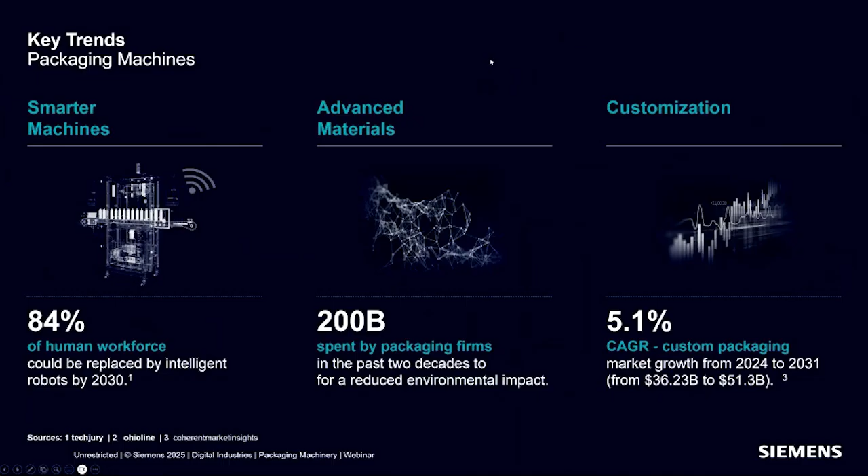The third trend is about customization. As you know, packaging machines incur a lot of cost. So when a machine can be used to package multiple materials for multiple products, it's a big game changer for the users of the machine. One survey predicts nearly 5.1% CAGR growth from 2024 to 2031, and most of this growth comes from the customization aspect of packaging. The slide also shows the figure; it is supposed to go to roughly 50 billions.

On the next slide, what we are trying to show here are some of the common challenges the users of packaging machinery face. This comes from a survey of CPG companies. The first one is general wear and tear. Of course, the older the machine, the wear and tear has a direct impact on the productivity of the machine. So that is a key challenge the users of packaging machinery face.

The next one is operator error. As you know, when we move from one packaging material to another, or a smaller package to a larger package, a lot of things need to come together to make it work. And if the operator makes any mistakes, that can also jeopardize productivity. The next key challenge I would like to highlight is product switching. In some instances, it's necessary to change certain components or elements in the packaging machinery, and that can also cause issues at the startup phase.

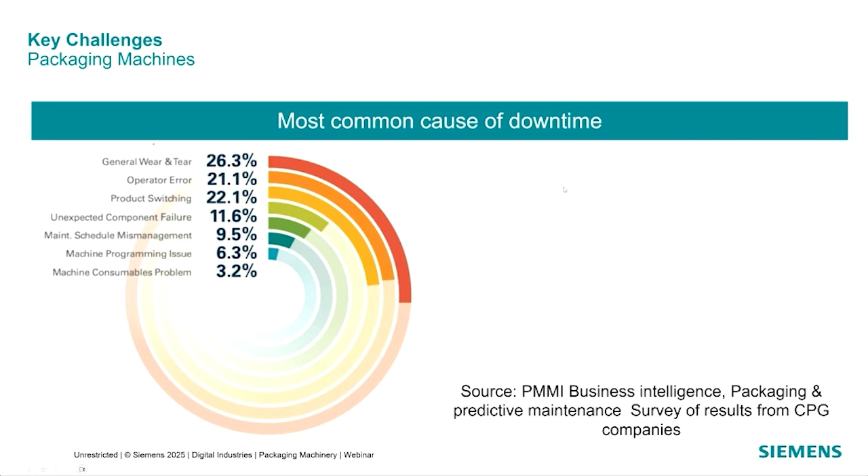And last but not least is component failure. Packaging machines have a lot of actuators, electric motors, welders, converting mechanisms, etc. Failure of these components, roughly 11%, is also a big concern for users of packaging machinery. So given these challenges and the key trends, the next big question for all packaging machinery companies is how they can respond to these changing market trends and launch products to market quicker, in a very responsive way.

Next, how can you gather information about the usage of the machine? Do customers appreciate the new features that have been delivered to the machine? Have the features been heavily used? Given the customization and the smart capabilities built into the machine, are manufacturers able to collect this information?

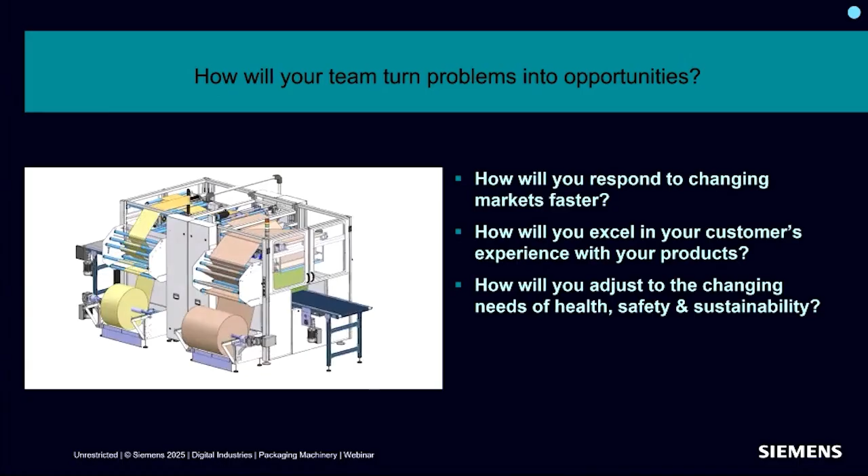And last but not least, how to adjust the packaging industry holistically for sustainability, while keeping the food and beauty products they protect safe and healthy until they are used and disposed of. So collectively, how can we change these challenges and problems into opportunities? To answer this question, we have Giulio Comauli. He brings a lot of expertise working with packaging machinery across Europe and the world. So can you enlighten us how to turn these problems into a competitive advantage for packaging machinery manufacturers?

Thank you, Rajesh. And let me start with an example. You told them I'm from Italy, but currently I'm in Belgium. So this is a perfect example to introduce the topic.

So if you need to move in your city or in your village, maybe a bicycle can be enough. But if you need to reach another city, probably you need to move with a car, or as I did to come here to Belgium, I have to use both the car and the plane.

Why this example? This example is to show that you cannot solve all the different needs and issues with a single tool. So what we want to show is that there exist different tools and different methodologies depending on the need and on the specific challenge. So there is no universal magic to solve all the different needs. You need to select the right methodology and tool to address a specific requirement.

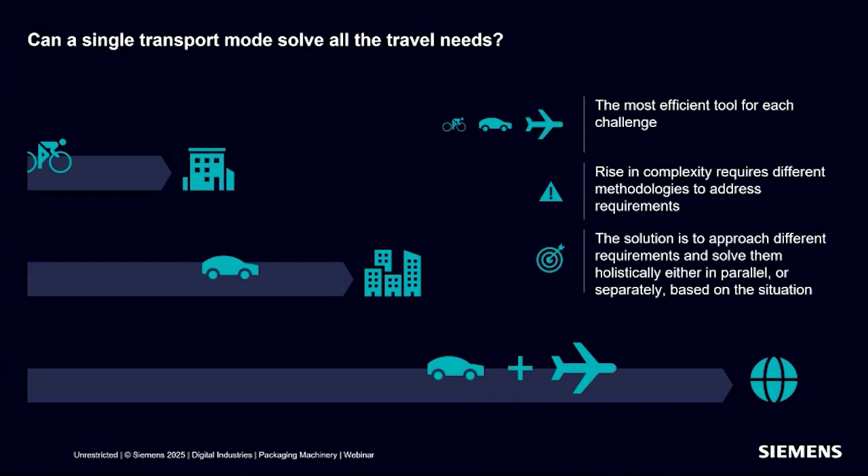Also due to the complexity that we are facing daily on the packaging machines. So the solution is to approach different requirements and try to solve them in a holistic way, or in parallel or separately, depending on the different situations. So this is just to, let's say, give a global picture.

And then let me start with an example to show you how we can help you to address the different challenges you face during the product development cycle. When we talk about the product, we talk about the machine that you build to package something. You will see during the presentation, there are examples with filling machines, wrapping machines, and bottle machines. So there are many different applications in this packaging area. We try to give a general overview.

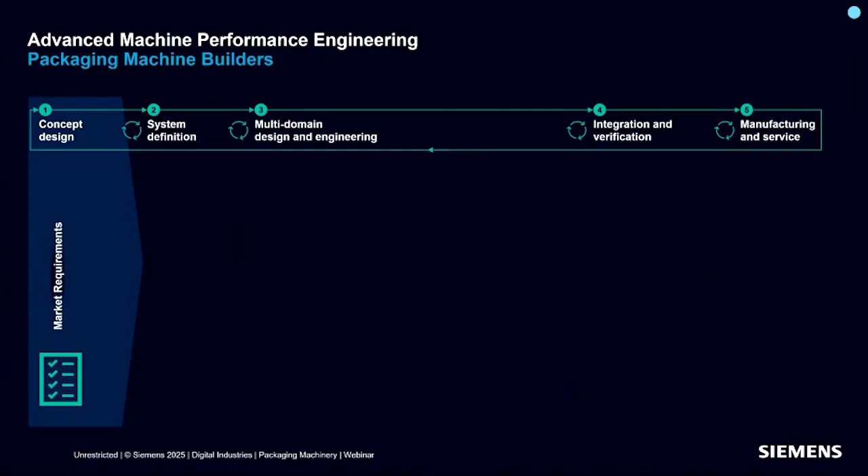And you can see on the top a typical process made by 5 phases. Concept design phase, in which, in principle, you try to translate the market requirements coming from your marketing, sales department, or industrial research into, let's say, engineering functional objectives to manage the required performance.

You can do that starting from a competitive product, using existing measurements from the predecessor machine. And you can try also through system simulation, to combine different architectures, trying to reuse as much as possible existing components or subsystems, or selecting new more performant or more efficient ones, and you define the architecture.

Then in the second phase, you need to define the system by selecting the right actuator, testing the right pneumatics, any other part of the machine that you need to design. And at this level, it is also important to start thinking about the control strategy to make your machine more performant and efficient at the same time, consuming less energy. To do that, we have tools working at system level, even before any CAD is available.

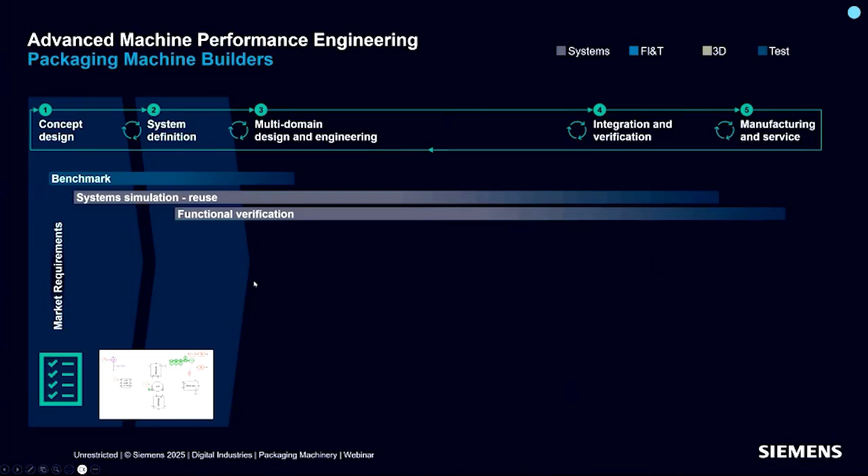And then we enter the third phase, that is the more traditional, let's say, simulation area, where you apply the typical 3D simulation tools and testing solutions in 2 different phases. First of all, you can use simulation in a front-loading phase. In principle, you bring the simulation capability at design level in your CAD environment so that your CAD decisions are supported by early simulation analysis, maybe to verify if the shape of a part of your machine can assure the right cooling to the electronics included in the machine, or these kinds of applications.

And then after that, you go into the more, let's say, advanced analysis to refine the performance of the machine, adopting all the different technologies: the system simulation, the CFD analysis for fluid and thermal simulation, and the 3D mechanical analysis for multi-body analysis, mechanism verification, durability analysis, noise and vibration analysis, acoustic prediction, and always with the test in parallel to make those assumptions in simulation very realistic.

So the trend today is to go in the direction of zero prototype, limit the number of prototypes, but this does not mean you can avoid test. Test is still important. It's still important in the validation and verification phase, or as we explained in the beginning, at the benchmark level. So, okay, limit the number of tests, use more efficient tests to make your simulation model more realistic.

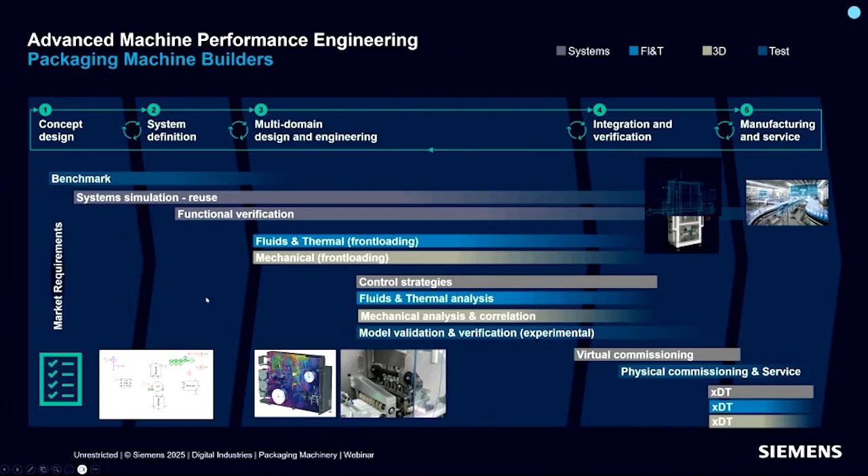Let me start to give some more information for the single phases, just from the concept design. So the important point here is the market requirements. These are the market requirements that our sales department and marketing division have identified, maybe to address a new country or a new zone with our machines, or to make machines more efficient in terms of energy consumption.

So at this point, it's important that as engineers we can convert those market requirements into engineering requirements. So what does it mean to deliver more performant machines or more efficient machines? It means that we need to work on the engineering part, increasing the throughput speed while reducing the energy consumption. These are more specific objectives we have.

And the architecture must be verified in different operational scenarios. So, how it behaves, new standards imposed in a new country, or maybe start to think how to connect the mechanical and electronic parts, or even the control strategy to allow those performances.

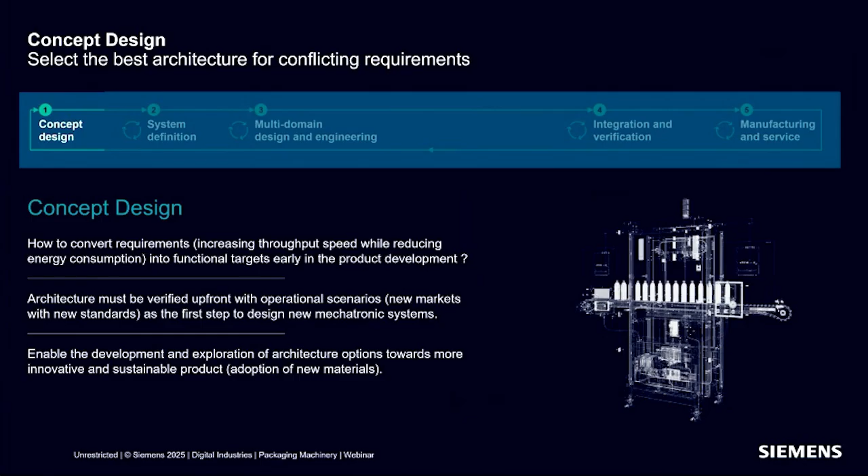So it is important that at this level we select the best architecture by exploring different scenarios. To better explain this, I have a reference from a customer. The customer in Italy is a leader in filling machines, mainly used for cosmetic applications.

They adopted system simulation in the concept design to determine the optimized pressure to allow the desired flow rate for the fluid they have to manage to fill the small cosmetic bottles. And in this direction, they were able to adapt the valves to assure the filling quality.

But what is really important is that by increasing the accuracy, working at valve level, they also obtained an important benefit by reducing the number of prototypes to test those different scenarios. And they also decreased the need for service during warranty and maintenance activity.

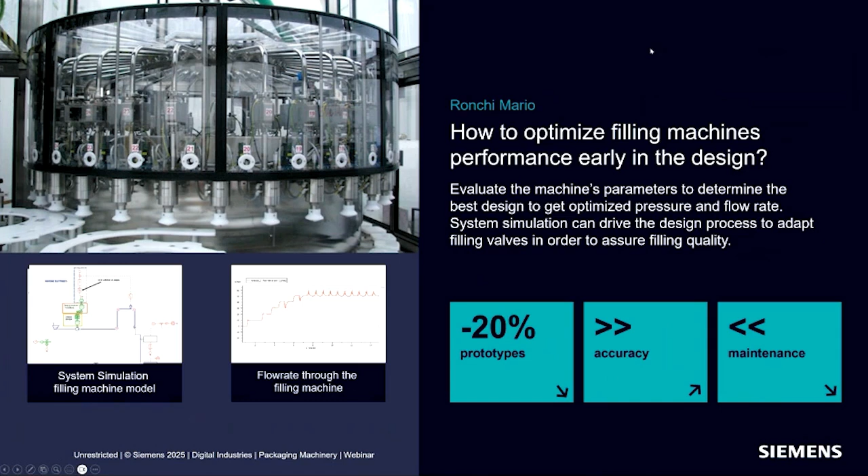So that's a nice example, just to explain how important it is to approach the design of the new machine or the retrofit of the machine, taking into account a combination of different subsystems and different scenarios in which you will operate.

So the second part is system definition. It is in principle the multi-physics representation and refinement of your architecture, considering all the components and subsystems which are part of your machines, still in a no-CAD environment.

This phase is important to evaluate how we can reuse existing technology or existing subsystems for which we are very, very good in terms of performance, when we want to reuse that technology or subsystem in a new concept machine. It is very important nowadays to be able to do those things. You can also start thinking about the general control strategy to apply

if you want to offer a better machine in terms of production and energy consumption. To better explain this point, I will show you a video from a colleague of mine working in factory automation when they needed to apply automation to the physical machines. And he can explain the advantage of adopting simulation in the early phase.

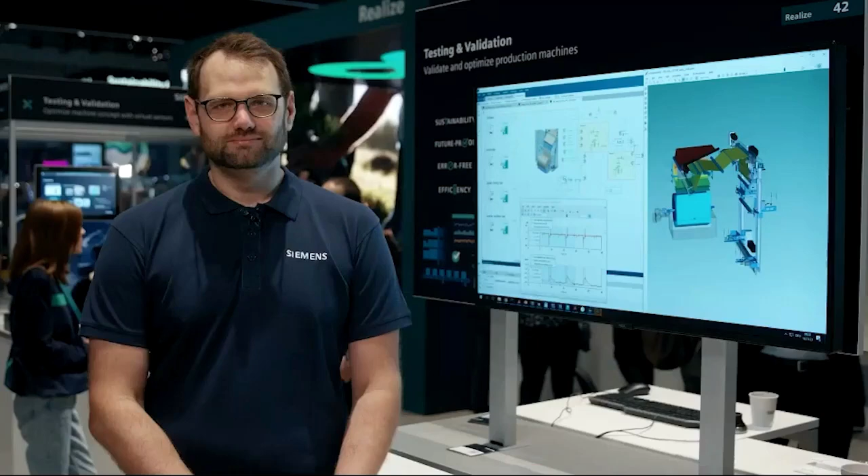Production machines are technically complex and also space-intensive systems. That means long development times and a high investment for prototypes. To overcome these challenges, we need to talk about the latest simulation approaches. Testing these systems virtually with a digital twin just requires suitable simulation models capable of replicating the technical operating principles.

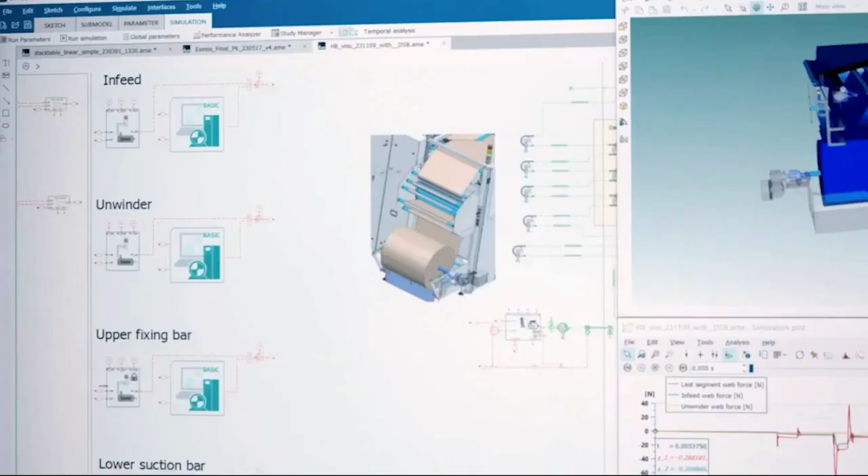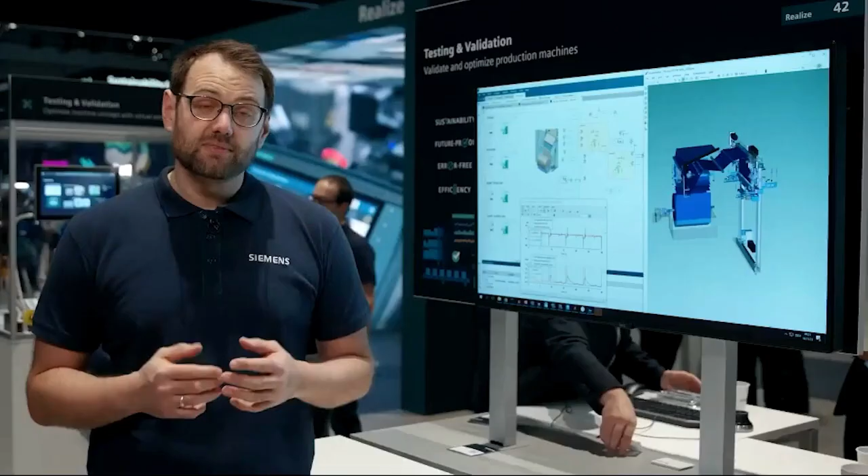That is possible today. These so-called multi-physics models, built with Simcenter Amesim, are able to precisely replicate the dynamic web tension behavior of continuous web handling in converting applications, as well as entire machines. To reduce complexity and support customers with leaner and more precise engineering workflows, the Siemens digitalization experts can supply customers with tailored simulation models of their machines as standalone functional mock-up units, which include the multi-physics behavior.

Or customers create their own models and incorporate them into their digital twin. By integrating these FMUs seamlessly into SIMIT, our virtual commissioning solution, it enables the customer to secure the automation program execution synchronously with a virtual machine model. In our example, it offers transparency to the automation engineers, as any required system variables like tensions, speeds, torques, etc. are accessible throughout the whole testing process.

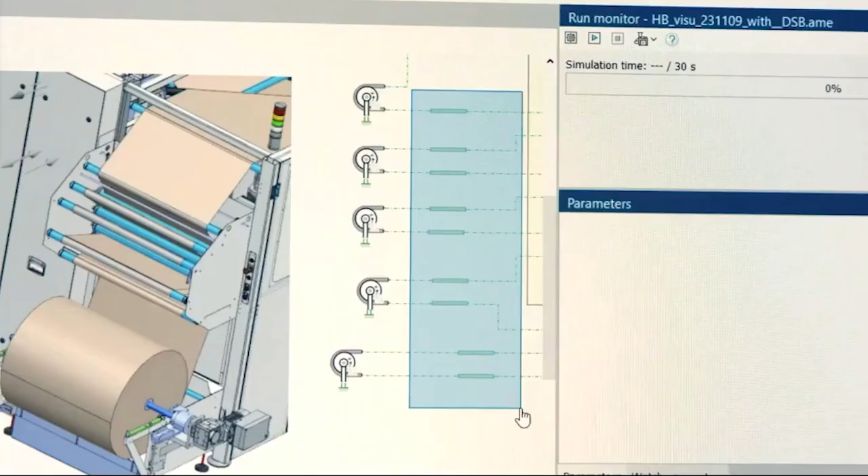Furthermore, the customer can parameterize the model, simulating different machine variants or control structures, as well as the impact of new product material by just realizing test runs in a virtual environment. Imagine the possibilities in terms of gained flexibility for an adaptive production without the necessity to invest in real prototypes.

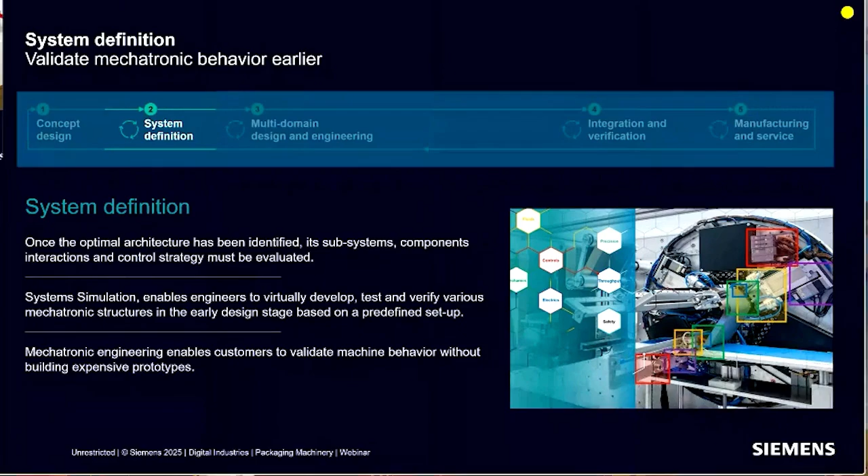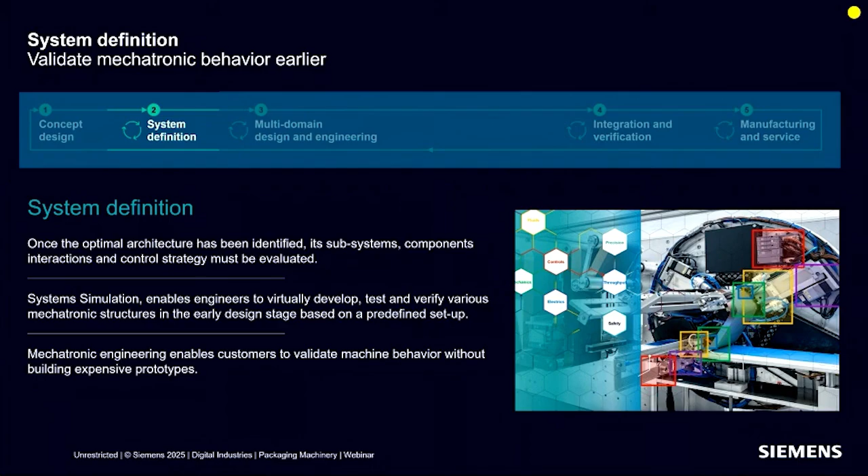So you have seen the point of view of the application engineer that indeed explained the end-to-end process and the advantage of adopting simulation from the beginning up to the manufacturing phase. So he extended the value of simulation also to virtual commissioning and operations, but it gives the point of view of the application and not of the software engineer, as we are to offer the right solution to reduce prototype number. So let's move to point 3.

So to me, what is interesting is until now we haven't talked about a CAD model or anything. Yeah, we are still talking about the multi-physics model without the CAD geometry, without talking about the details of the geometry. We are looking at the requirements and how to match the product architecture, its subsystems, to meet the requirements, right? Yes, correct. So indeed, what we have done in phase 1 and 2 does not require any CAD.

Here in phase 3, we are in the more traditional simulation area where you combine the CAD design with the simulation tools and system modeling and testing. So you have a representation on the bottom of the slide of the different phases. As I told in the beginning, you can anticipate simulation into the design phase using some specific tools for thermal analysis, flow analysis, structural analysis within the CAD environment, just to help the designer take the right decision earlier and to limit the cost and the modification requirements and whatever you can imagine when you discover that the problem is on the final product.

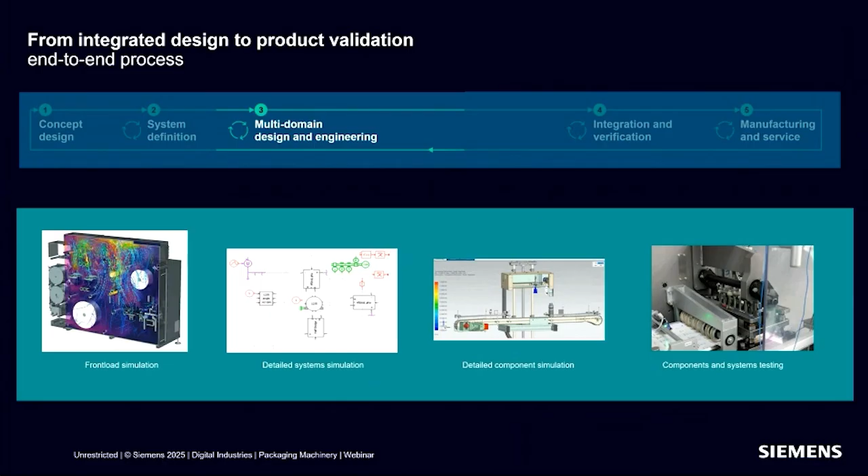You can also assess at this level the controls and the detailed system simulation while you use CAD in your mechanical simulation to evaluate forces, vibrations, dynamic behavior of your machines, acoustic radiation, whatever you can simulate in a 3D environment. Always supported by an efficient test activity. So it means that I don't need to measure the full prototype, but I just need to measure some part just to be sure that my model is behaving as the component and to adjust my simulation assumptions to replicate the behavior of the machine. To show, first step, how we can include simulation in the CAD phase.

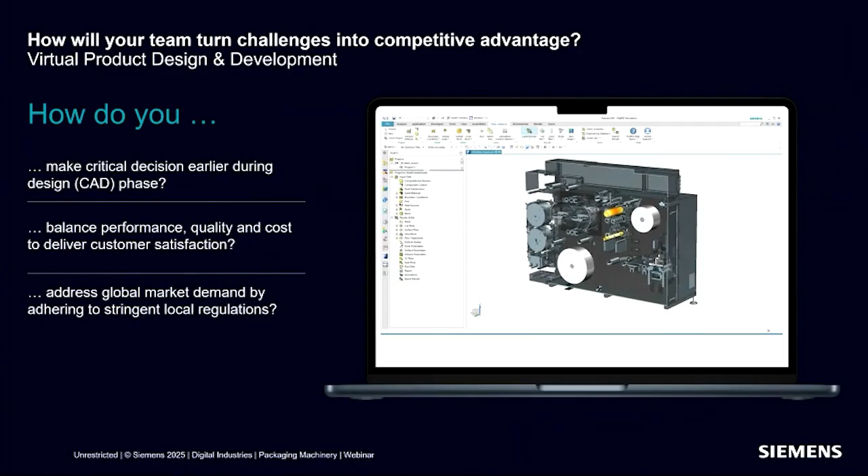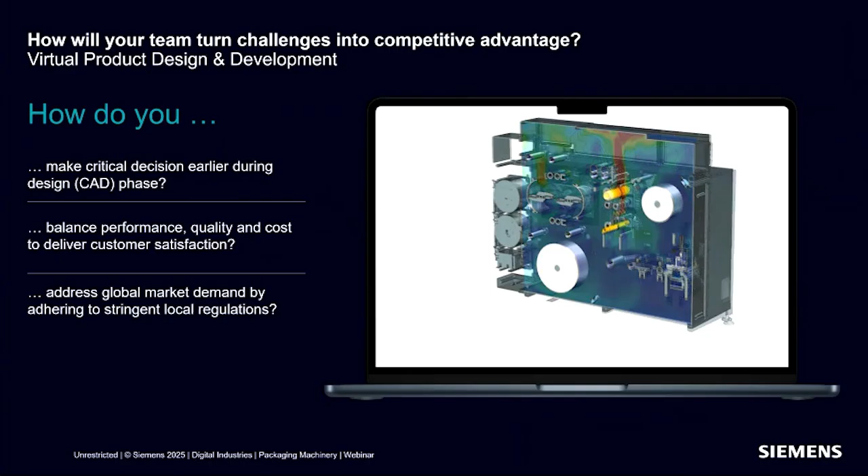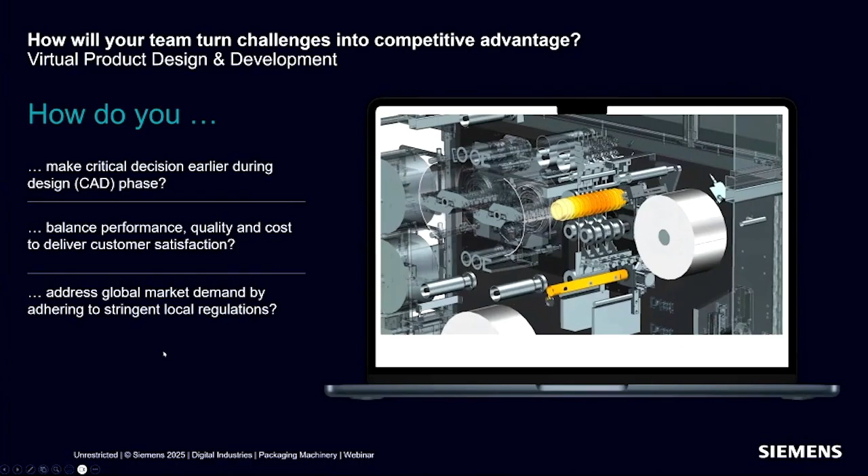In the example you see on the screen, there is a thermal analysis of a welding drum in a packaging machine. So it's important that during design, you define the right position, you have the right heating cycle, and the flow of the hot parts is distributed along the machine in the right way. So this is something that you can already do in the environment by front-loading simulation, so anticipating the adoption of simulation in a very early stage. So the designer uses workflows and specific simulation tasks to confirm and validate their design decisions.

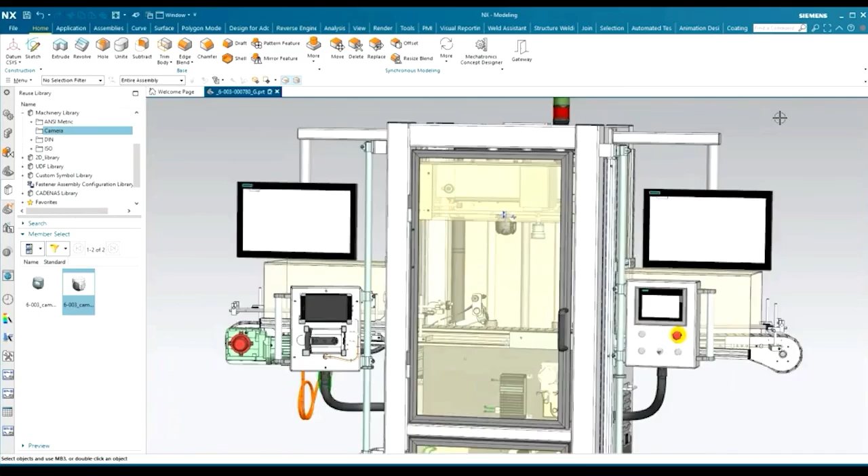You see how the integration between the CAD environment and simulation environment is crucial when you need to verify a modification on the machine. In this case, it's a very simple modification, the addition of a component in this quality test machine to verify the leakage. So if we add a new component, a new mass in the machine, we need to have the right answer very early in the design.

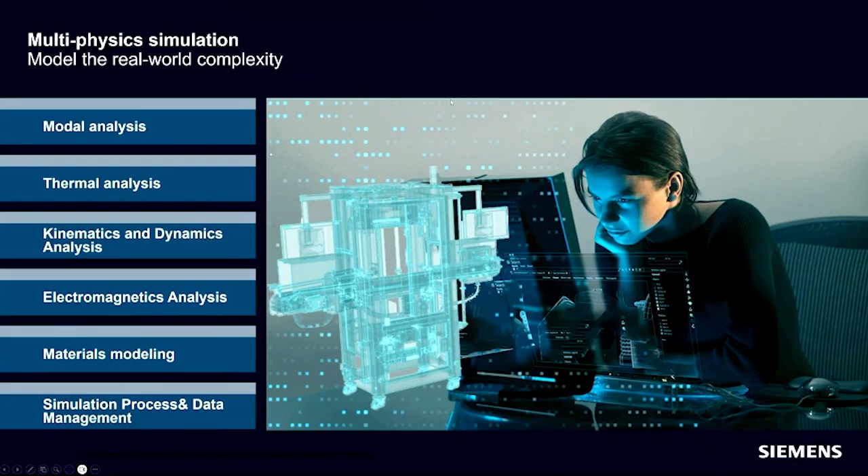So in this phase, it's also important to summarize the physics we can simulate to represent the real world complexity. You see, there are many different aspects, from modal analysis behavior, thermal analysis, the analysis of the kinematics and dynamics of the different components and moving parts, but also electromagnetic emission. Then you can also model the materials, so the molecular part of the story, to better identify mechanical parameters of the material you use in the production. And of course, all of these things are fully supported by simulation and process and data management tools that ensure you always have the right model at the right time.

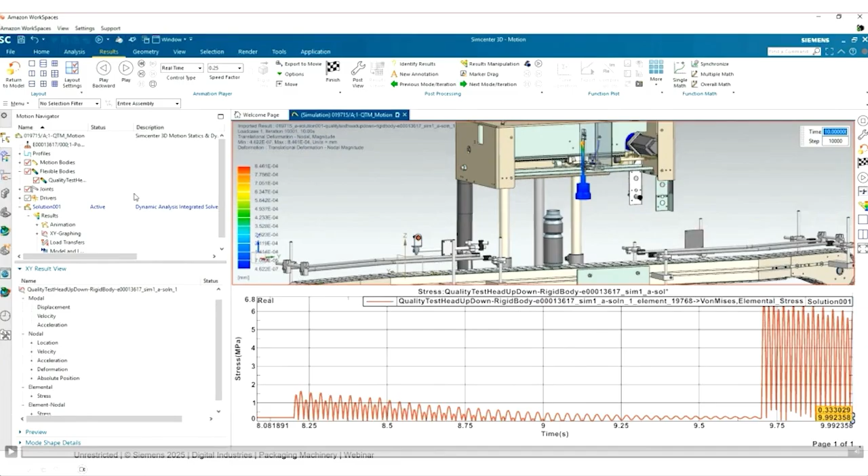Here you see where we represent the geometry and the dynamics of the machine during the operation in a virtual environment. On the bottom, you see the stress value along the time. And at the same time, you see the mechanism moving. So you can correlate the different phases of the production in a visual way while looking at the different physics and component behavior.

I just told before that we also have the tools to help you in modeling materials. Of course, this is more for the material producers, but it's also important for the packaging machine builder, because they have to manage those materials. And sometimes it's very important to be able to calculate and obtain mechanical properties and predict the behavior of the material using those properties in the more standard finite element analysis simulation, to take into account how we need to modify the machine to manage a new material.

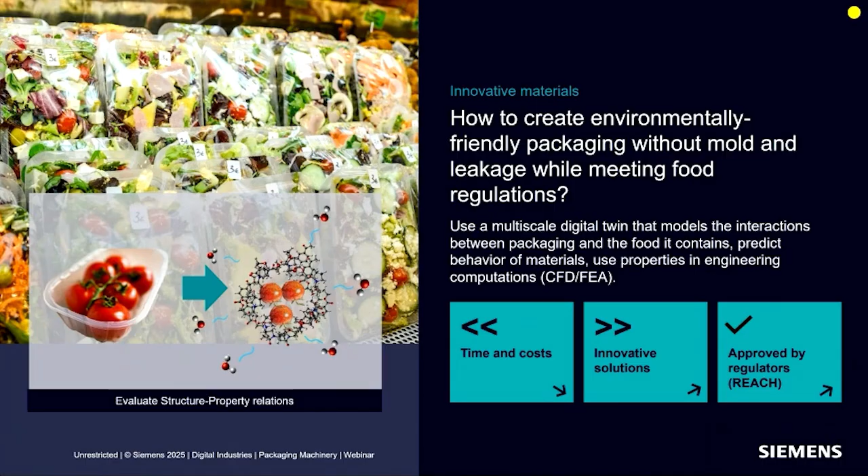This is very important nowadays, because there are a lot of companies moving and exploring new solutions to replace plastic in the food packaging industry. So just to give you the information that we can also manage the molecular part, reducing time and cost, of course, exploring new innovative solutions, but also be sure that we have approved the solution.

And here is time for showing you another video where we explain how test can help you during the product development. Simcenter SCADAS allows you to connect different types of sensors to easily assess and analyze how noise, vibration, durability, and rotational speed phenomena are interrelated. The small and portable unit is battery operated for full-day autonomy and securely saves all measured data on a local memory card. And not only that, it fits in your pocket.

It can be pre-programmed for specific measurement tasks and shipped to a local operator as a more cost-effective alternative to sending an actual engineer. The Simcenter SCADAS can also be combined with a binaural headset for high-quality binaural recording, replay, and sound quality analysis. After finishing the test, engineers can further analyze the acquired data in Simcenter Testlab.

Next to the time data, the recorded video can be displayed and replayed in order to better understand different dynamic phenomena correlations as a function of time. Further processing into frequency, octave, and order domain helps understand underlying phenomena, making SCADAS the Swiss pocket knife for noise and vibration measurements.